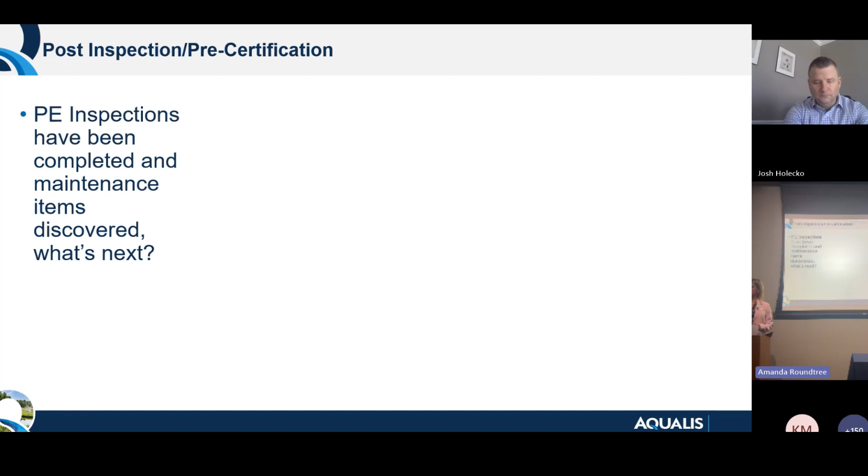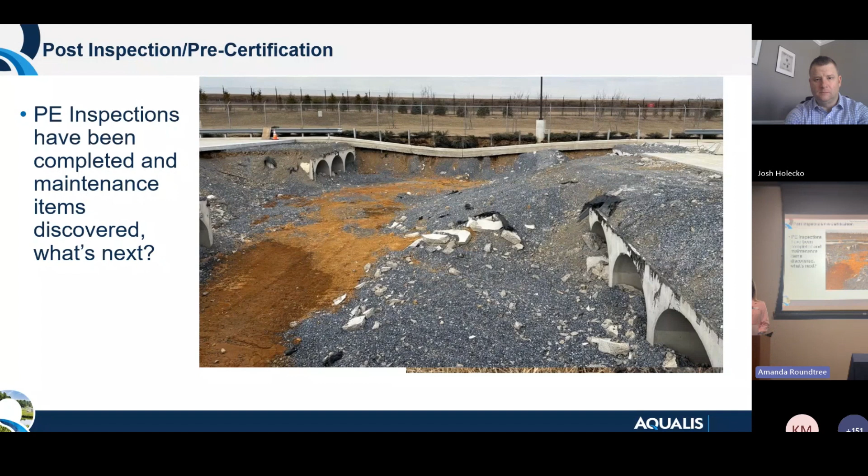We'll see pictures of these basic sinkholes. Sometimes they're minor, but they can become much larger.

At AQUALIS, the field operations use a standard operating procedure so that whatever type of BMP or stormwater control measure you have follows a certain protocol, from inspection to preventive maintenance, and then to repair if needed.

Repair, restoration for a bigger issue, and then full rehabilitation where it's needed. We hope you don't have to go to the full rehabilitation point, but we can help you along the way.

As engineers, we'll see something going wrong and ask why it's going wrong. We should analyze and reinvent or redesign this, because that's kind of the fun part, doing the analysis.

Sometimes we find that the way it was done 20 years ago maybe wasn't the best idea. There might be a pretty easy retrofit we could do to make this much better for the long term, give it a longer life, and make it less difficult to maintain.

So just a couple things on what types of maintenance are expected and routine. Nothing is really rocket science here, but BMPs that are designed with non-natives need attention.

We had a little conversation this morning about non-natives - they need to be mowed like normal turf grass, and unfortunately that means really regularly, maybe once a month. In some climates, maybe more often.

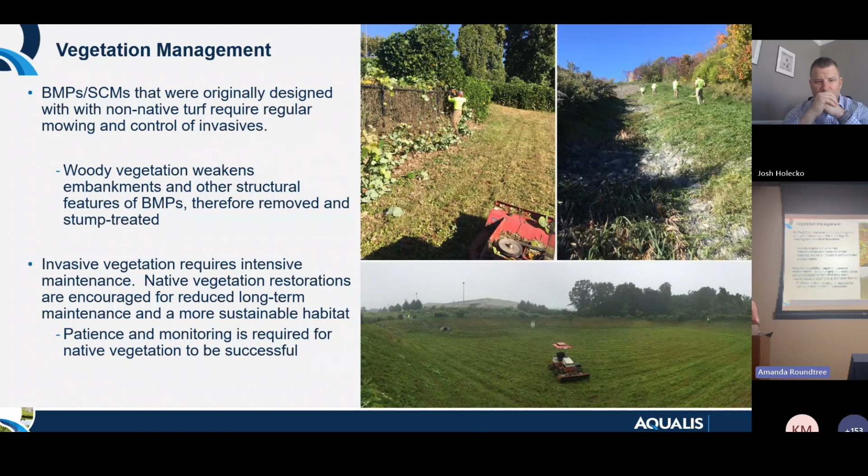So now you're going to have equipment out there all the time mowing lawns. This might look like a landscaper job, but it's a little more than that when dealing with stormwater measures, because what type of equipment is okay to use isn't always the same thing - sometimes we don't want compaction.

Sometimes we don't want a larger piece of equipment running through the bottom of this. Maybe it's just dry detention, but it could be a bioswale, so we don't want a giant tractor out there compacting all the soil. This is the kind of thing our field guys know and understand, and they're able to connect the dots when it comes to what maintenance is the right maintenance.

Woody vegetation, as you've heard about many times, can really weaken embankments. Those things need to be maintained.

Invasive vegetation - if it's non-native and you have invasives, you mow it. If it's natives and you have invasives, there are more processes involved if you really want your natives to take off. It's more selective - maybe only twice a year you deadhead those invasives, do a little spot treating with chemicals. It's a bit more involved.

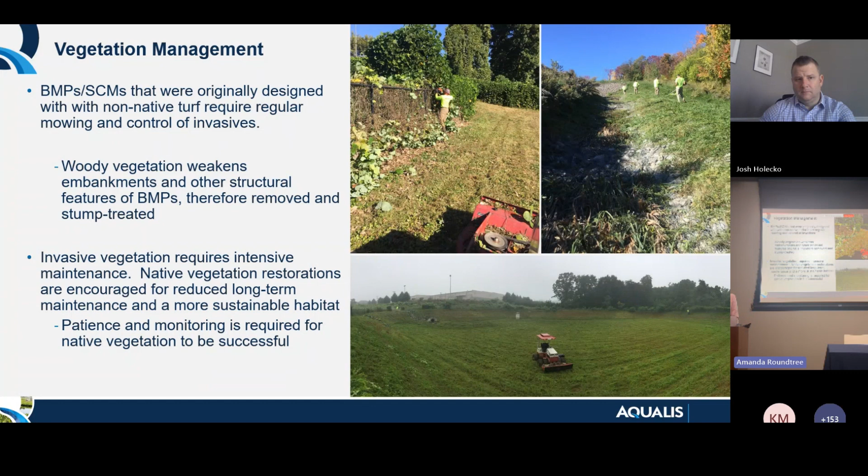Sediment, trash, and debris removal from a lot of the points of entry and discharge - it seems like that's not all that difficult. Well, then get out and do it. It really means get a shovel, clean out those inlets, clean out the outlets. If you don't do that simple thing, you can end up with a plugged system.

Then you overflow and flood somebody, or your embankment for the pond gets wiped out. If it's an outlet structure that's plugged, you could be pulling off the whole end sections of your pipe if that system isn't being maintained. It's just one little thing that starts to unravel, and then you end up with a lot of expensive stuff to deal with.

Josh, jump in anytime you want to add something to this, because I know I can really ramble. You're doing great, I'll keep going.

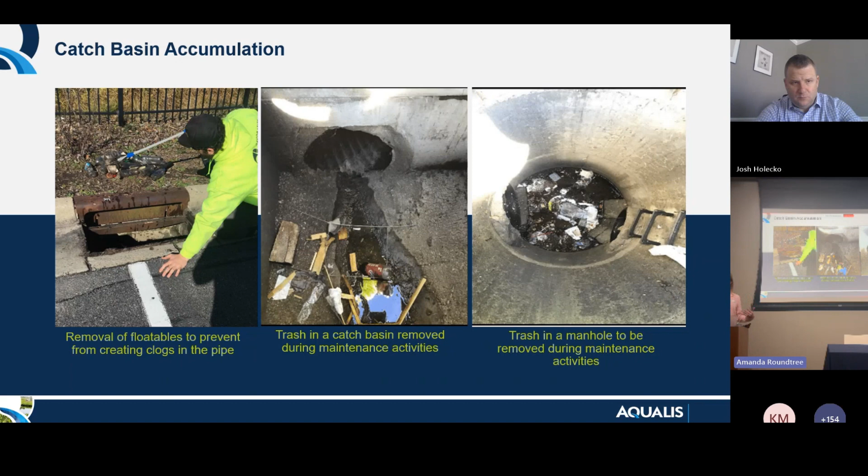Catch basin accumulation, same thing - sometimes it's just clean out your catch basin, but if you don't, it means potentially plugging your system again. You could end up having sinkholes as a result, because the water's going to want to go somewhere, and if it can't go through the pipe, it's going to find a joint, and then the whole system gets to be a mess.

We're going to hear from a couple of the proprietary system people, so I'll save this for them. But some of them do include a valve that needs to be opened and closed every now and then to make sure you could dewater or get things working. Sometimes you want to close a valve to over-detain and create more storage. And if the valves stop working, the system isn't going to work for you.

Amanda, the one thing I'll add is all locations are different and unique, with their own types of assets or proprietary systems on site. So the frequency we're servicing these from a maintenance perspective, and time of year, matters, you want to get to the undergrounds before spring and fall to make sure the water's flowing during rainy season. So frequency will be unique by property and geography. We take that into account as we build maintenance scopes of work to make sure we're visiting these sites at the appropriate time.

Thanks, Josh. I have to hold the computer in a funny way so it's on the microphone, so hopefully it's working.

Pervious, permeable, and grass pavers are their own sort of headache in a different way, and that maintenance will depend largely on what type they are. Manufacturers have certain recommendations for how you should maintain them. Usually you observe first whether you're having issues like clogging, staining, ponding, or settling. Perform some infiltration tests to see what you're actually getting, and if it's not where it should be, that's another indication you need to get out there and do maintenance. Sometimes it's every six months.

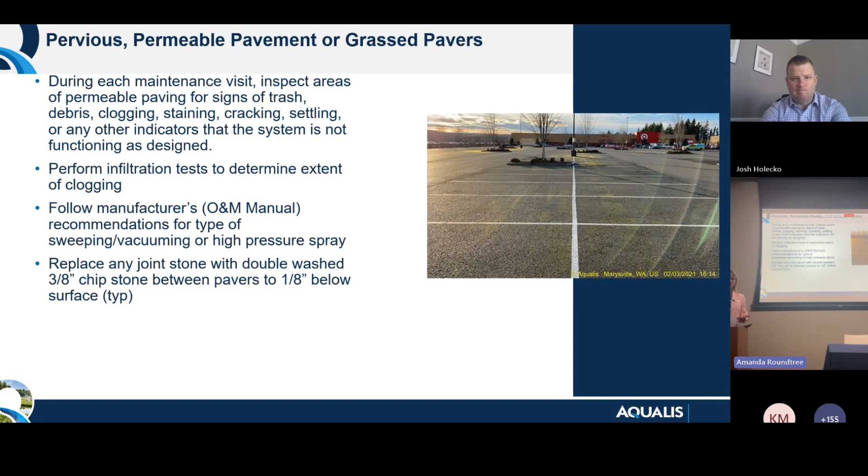And if it's a type that has joint stone, as soon as you clean that, a lot of the joint stone leaves and needs to be replenished, or your pavers will start to move around and not do their job.

Infiltration, biofiltration, rain gardens—anything that's green—similar to some of the stuff you've seen, only we don't just go out and mow, we have to selectively mow, maybe once or twice a year at the right time. Repair erosion areas, replace any dead vegetation with healthy new natives, remove engineered soil and amend it.

If it's starting to clog, you might see ponding, bare areas, or other signs indicating the water has been ponding there a lot. So we need to take that out and replace it with new soil, and look at the embankments and overflow weirs.

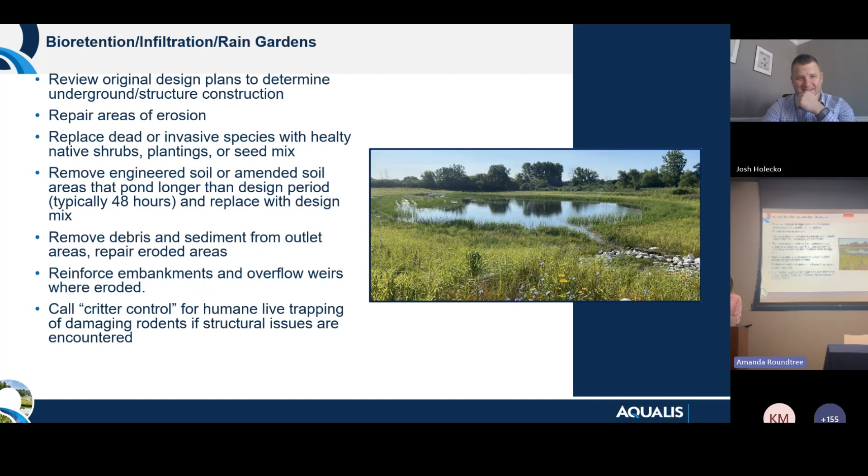We saw some dead critters on the screen this morning. I don't know if Leif is still here. I'd kind of rather try to do live traps and move them off if you can call a service for that. But if you have too many and it's not worth moving the muskrats, and you'd rather have a muskrat fur coat, then that's your choice. I don't know, I'm a hunter, so I'm not totally against it.

Then we have a couple of repairs and case studies, similar to the first slide but not quite as critical or crazy. This is common—you see manholes and inlets with pavement breaking around the edges, and sinkholes in parking lots. That really means water is getting into that structure somewhere else, not going in the right way, not going into the inlet where it's supposed to. It's going down the sides into the structure, or water is leaving through joints in a pipe.

So getting a CCTV inspection out there first to see what's going on is a nice first step. In this case, it's remove the bad pavement, excavate around the manhole, seal the manhole, and then replace it all. Josh, tell me if I missed a step, because I'm not really the person doing it all, I'm just the person saying it.

These are common failure points with aging infrastructure around properties, but also due to freeze-thaw. These are common repairs we do thousands of every year. It's about making sure there's not a safety issue—if it goes unaddressed, it becomes a larger, more catastrophic issue. So make sure you're inspecting those and addressing repairs as needed, so you don't have a larger repair down the road.

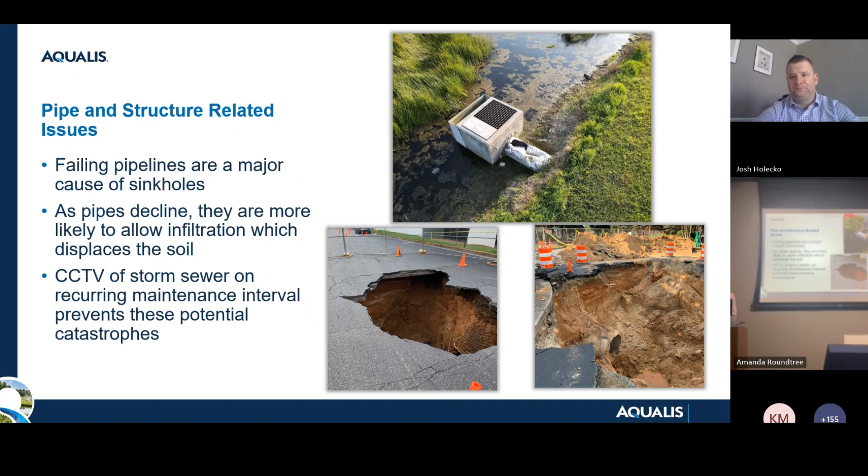Josh, do you know a lot about this site? Because I'll say what I see, but that's about all I know. Yeah, I don't, but this is very self-explanatory as far as this HOA. We work with a lot of different HOAs and different property owners. This one had a neglected area of overgrown vegetation, pipe failure. The outlet was clogged and ultimately it impacted the retaining wall.

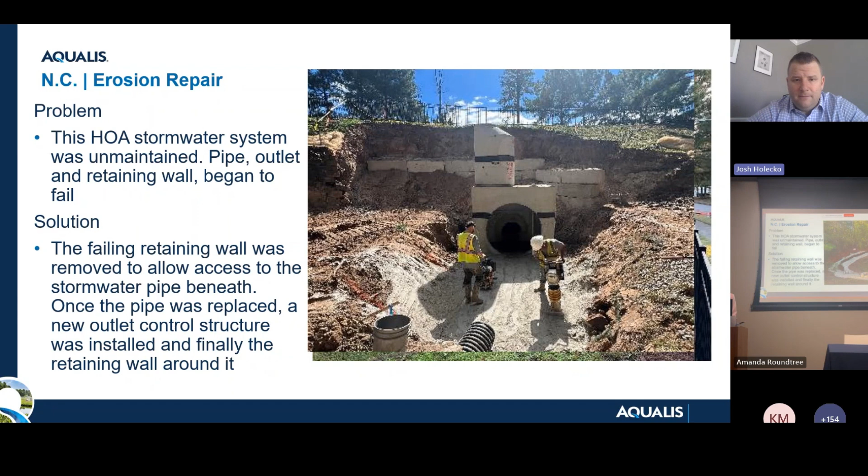So again, something that could have been maintained on an ongoing basis at a very inexpensive frequency becomes a much larger repair, getting engineering involved, structural engineers, to make sure we bring that area back up to design to stabilize the area.

Similar in that it's a pond, but a little different story. This is a pond in Michigan that looks like it hasn't been maintained. A lot of invasive species, a lot of excessive sedimentation, and now the pond's not functioning. I'm sure the outlet's probably plugged, and then they go in and dredge it, and then all the soil is not stabilized. So then that all ends up in the hole, and it just becomes kind of a vicious cycle, especially if the rainfall is not cooperating with you. So making sure that you get the right stabilization when you install is pretty important. Sometimes Mother Nature doesn't play along.

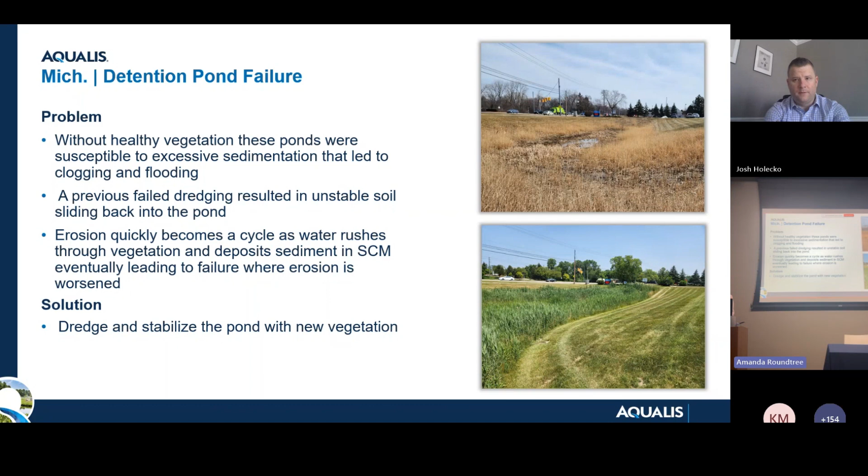Josh, just jump in if you want to talk about this one too, looks pretty obvious. Yeah. Another outlet control structure. Another neglected retention pond, and the OCS is obviously in rough shape. So we ultimately excavated and replaced the pipe and removed the sediment and debris that was in the pond, and then the invasives that we were able to remove. But again, these are very common failure points.

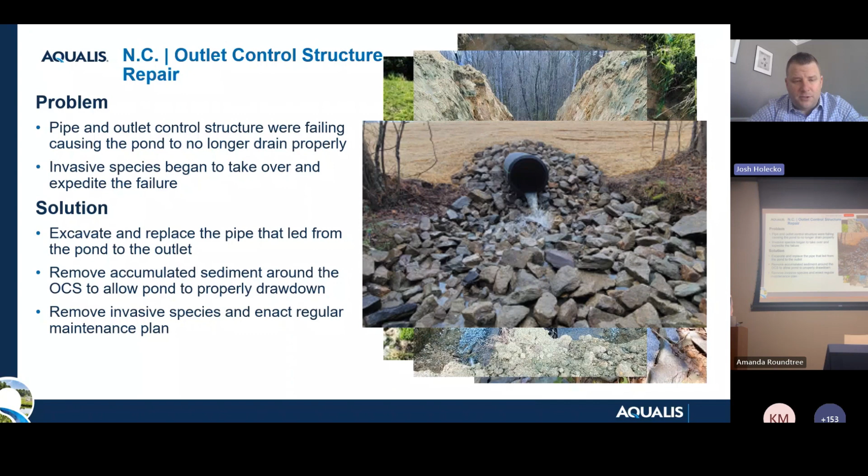Property owners and managers get in the habit of, if it's budget constraints or maybe just not knowing, and over years of neglect that becomes much larger issues. So it's all about taking over that property when it's constructed, or getting it to a maintainable state, and keeping that maintenance up to eliminate some of the larger repairs that you're seeing.

I've just gotten a hand signal from one of our staff, Josh, and I won't say which kind, but it basically was like, you better hustle. Hurry up. We have 2 minutes, so we got to talk fast.

And everybody will get a copy or be able to scan through these screens if you want to pause, take a look. But basically, you're looking at inspection and then vegetation management, structure management, maintenance, and documenting this. The documentation is important because now when you do get a violation or it's time to submit for a recertification on your BMP, you have all this documentation that you can provide to agencies without having to scramble at the last minute.

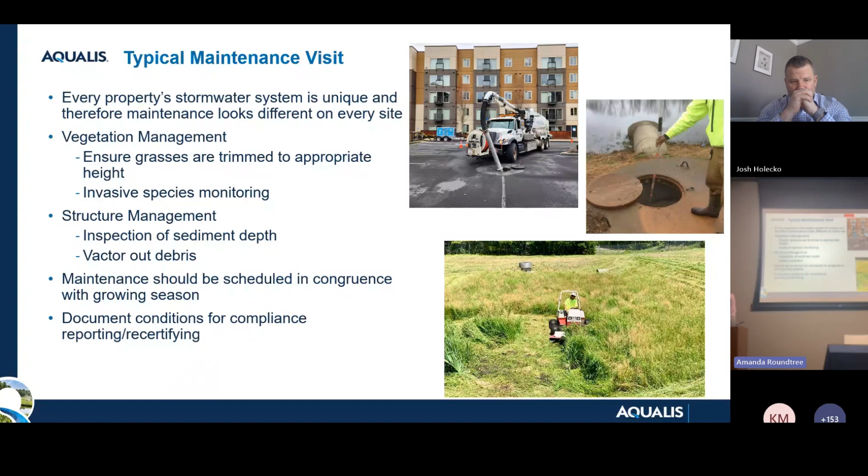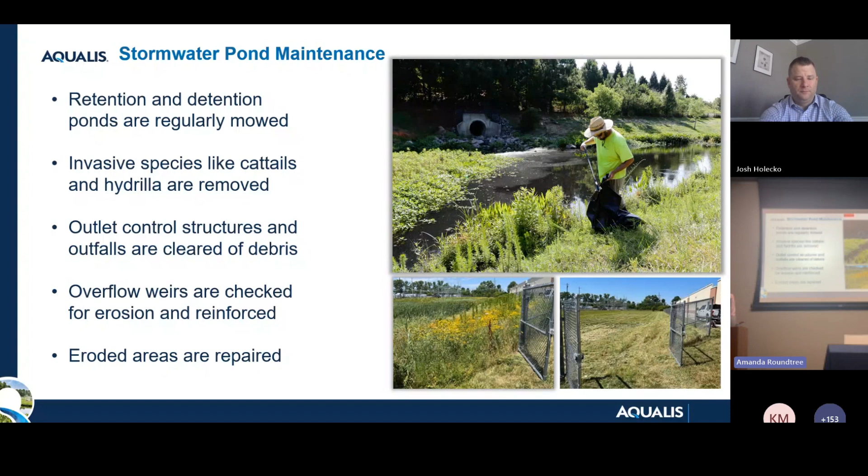Stormwater pond maintenance, again, it doesn't have to be expensive or overly difficult. We're gonna go out there and look at mowing, taking out invasive species, outlet control, looking at the overflows, looking at eroded areas and fixing them. We do a lot with CCTV and jetting and Vactor, so getting in those systems and cleaning them up before they become a problem that is gonna cause you a lot more trouble. Those things that are out of sight can be out of mind and then can be a real headache.

Now, Josh is gonna tell you about one of our clients that we are doing a lot of all of this for, right, Josh? Yeah, so I'll try to run through this quickly, but the main objective, the national multi-site QSR, Chick-fil-A, what they were after is ultimately get a better understanding of what assets they have on their property, what condition are these assets in, and then ultimately making those corrective repairs if any are needed, and then implementing an ongoing maintenance plan.

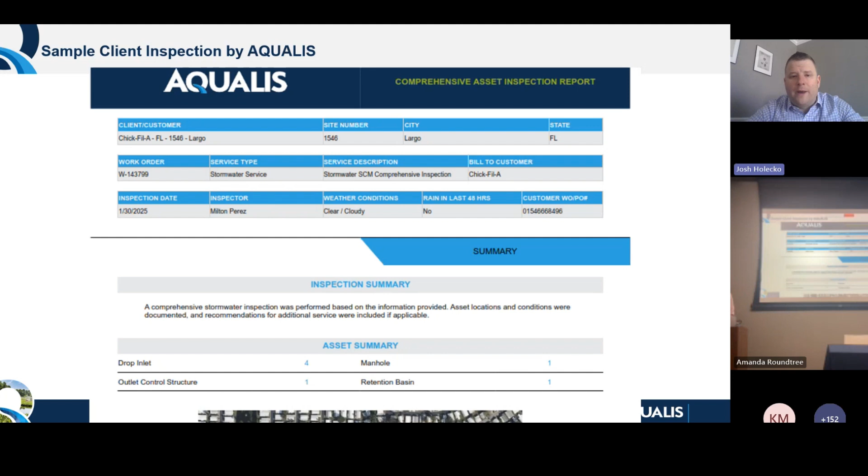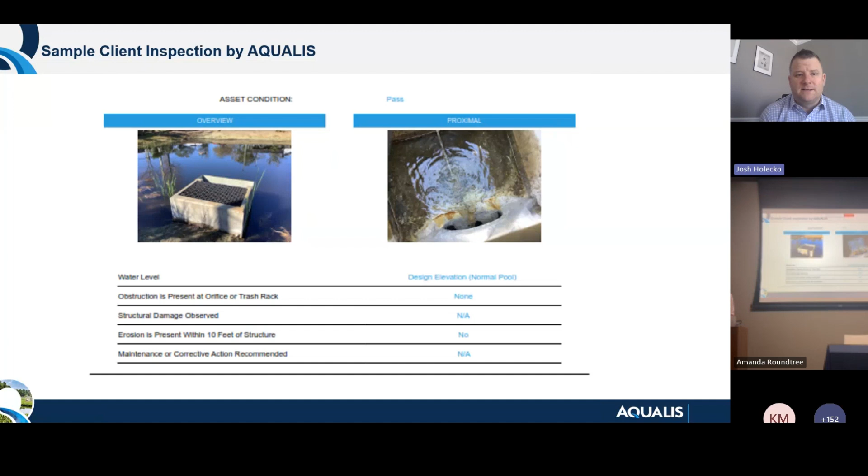So, a couple thousand standalone properties throughout the country. We're going out to collect this asset information. As you can see on this one, you have an aerial of where those assets are. So going through those, taking photos, and then obviously there's some basic questions that we're answering to better understand and ultimately give that back to the team at Chick-fil-A. So, it's a pretty robust inspection, pretty basic information, but it provides a lot of value to not only the customer, but to us as we come up with the plan from capital repairs, ongoing repairs, but also the maintenance that we're talking about today.

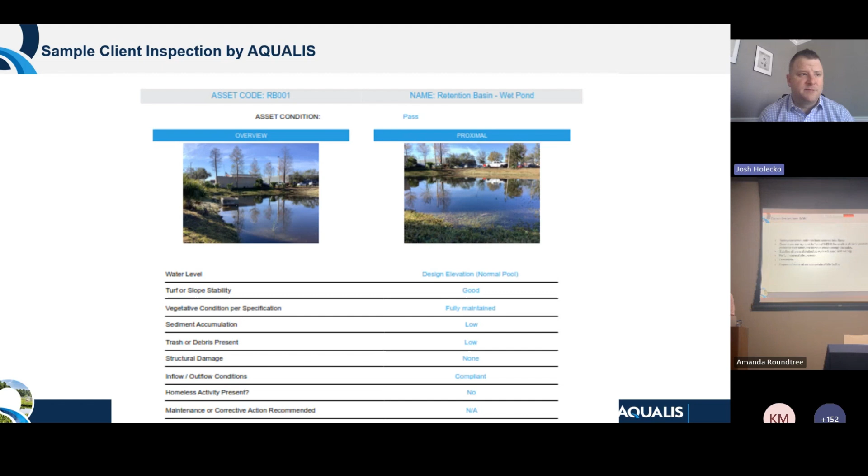So this one is an example. As we went through the inspection, we saw, you go back one. Yeah. So at this particular site, there were a few things that needed addressed. Obviously, we needed to do a pond, a basin dredge, pipe replacement, and some structural clearing and rehab of some overgrown vegetation. So the one thing that we take pride on is we line item and give great detail on what we're actually addressing, because it also allows the customer, the property owner, property manager, to provide this information to the municipality if there's questions on what was completed, when it was completed. So it does give great detail.

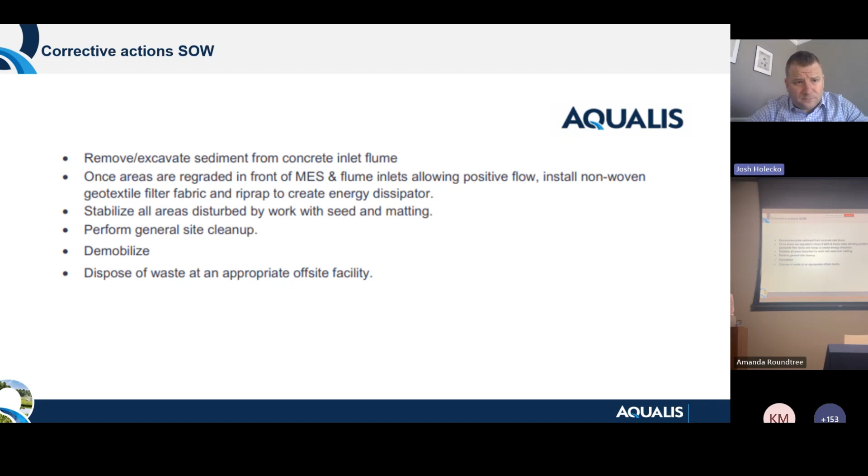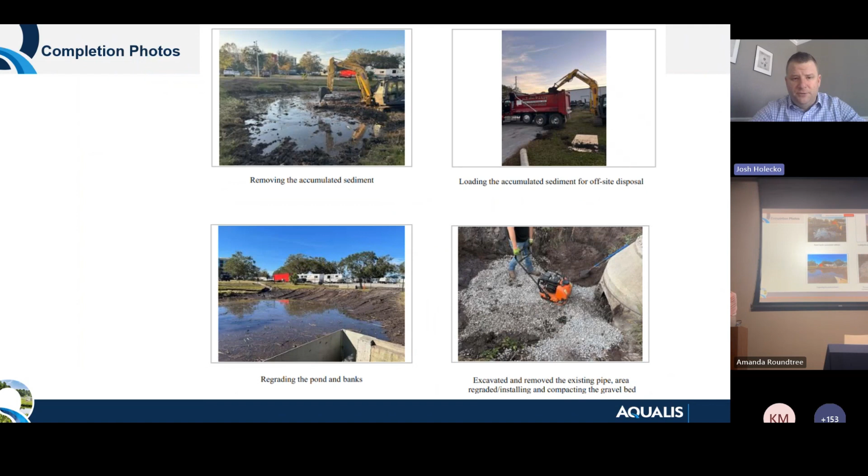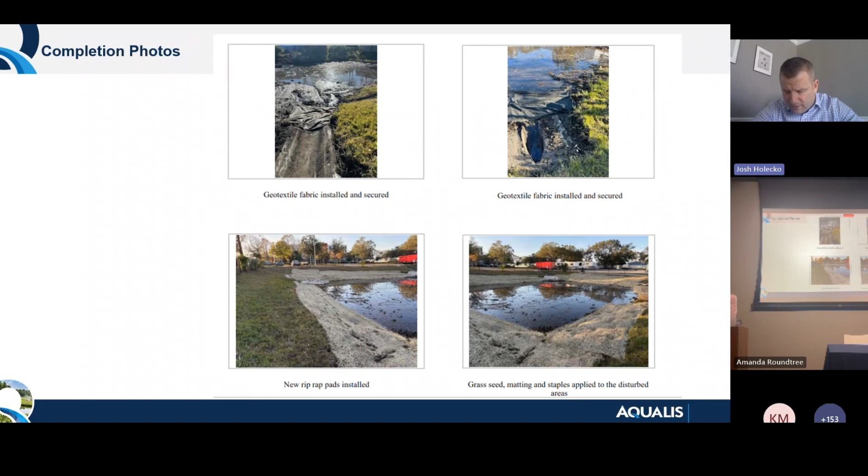And then lastly, we've gone through the scope of work and completed these repairs. We do provide before and after photos of what the site looks like and ultimately what we addressed. And so it gives the full picture from start to finish, to inspect the property, make the necessary repairs, and then implementing the maintenance program for ongoing maintenance at this property to make sure it stays within compliance. And then ultimately functionality is critical to the site as well.

Okay. We really hustled in that last 2 minutes. I would have kept talking, but you told me to hurry up, so that's okay. You did good. That was good. And then you don't have to exhaust yourself. You can save your energy to heal up.

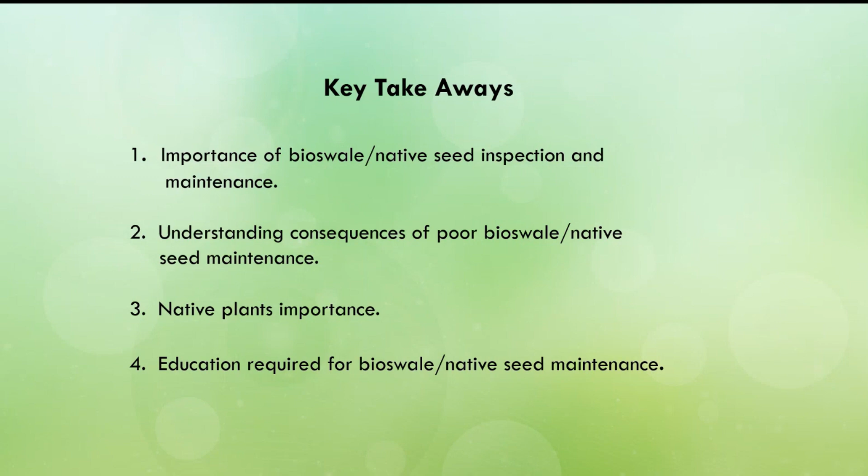So now when we talk about the importance of bioswale maintenance, we also want to mention bioswales, bioretention, and rain gardens. They're functionally similar, with variance in engineering elements. They all manage stormwater runoff and they improve water quality. However, they're different in their design and purpose, but not so much in maintenance.

So poor bioswale maintenance comes with consequences. Neglecting maintenance can actually be expensive, costly, and time consuming. So what happens is when a bioswale is flooded, it may stop filtering the water, causing pollutants to enter the waterway. And also the ponding causes root rot.

And we have also seen overgrown shrubs. They entangle, which inhibits drainage and kills off the other native plants. And the workers complain about rose bushes because they have thorns, and the roots can entangle in the actual drain system. Once they understand the roots or the thorny shrubs are good for trapping trash and leaf debris and thrive in a water environment, they come to appreciate them.

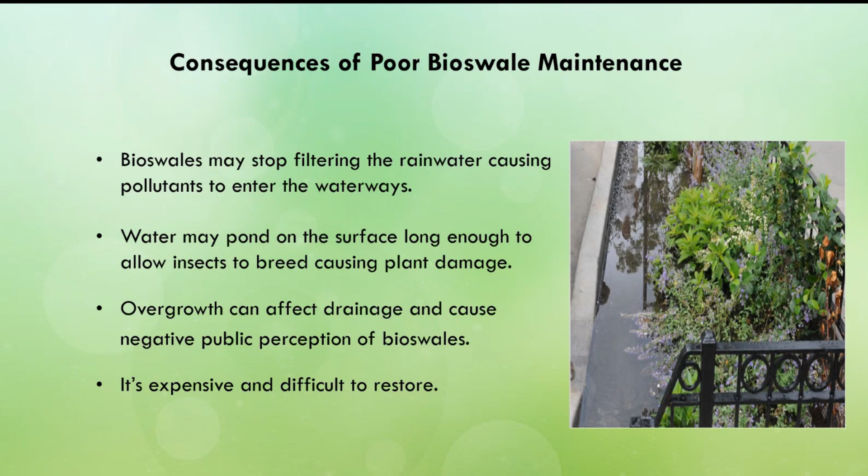There are issues that affect bioswale performance. If the plants are dead or dying, their ability to perform their biological role is diminished. If sediment, leaves, and trash block the inlet, the bioswale will not be able to take in stormwater flowing from the street, which may cause flooding.

If it's left unmaintained too long, fallen leaves tend to form matting, which makes it difficult for water to penetrate past the leaf litter layer into the soil below. This matting can also suffocate the perennial plants in the bioswale. It's okay to leave some leaves for nutrients. They provide habitat for moths and dragonflies. So just a few is okay, in my opinion. So if any of the above occur, bioswales are actually less effective in reducing bacteria levels in the storm runoff.

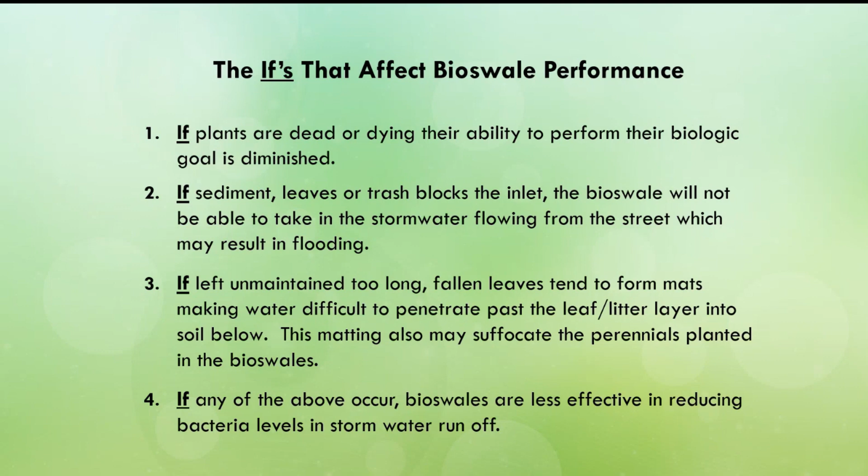Native plants are important; they're very hardy. They can tolerate untoward conditions, they provide habitat and food for wildlife, are essential for human existence, and are healthy for our ecosystem. They also stabilize and provide structure to the bioswale, and filter and reduce pollutants and bacteria. If the area is sparse with no native plants, it can cause erosion pretty badly. So it's important.

When it comes to education, I'm gonna hand over to Karen. Good afternoon. I'm Karen Janicek. I do a lot of the quality oversight of the bioswales, our staff, and our contractors.

And so education is very important. That's one thing we really work on with our employees and our contractors. We don't just assume the contractor knows how to clean a bioswale. So we go out, we work with them, and once we have a comfort level, then they're on their own. And then they send me a list of which ones they did, and I go back out and do a check.

Bioswale construction, we do bioswale construction. It is important, and I know we're talking about maintenance, but when we do bioswale construction, this is a good opportunity for us to educate the public, the people that we work with. And something that you as engineers may want to adopt as a best practice, and this was our discussion, is that when you hire a contractor to develop and build the bioswale, you want to have them scope it at

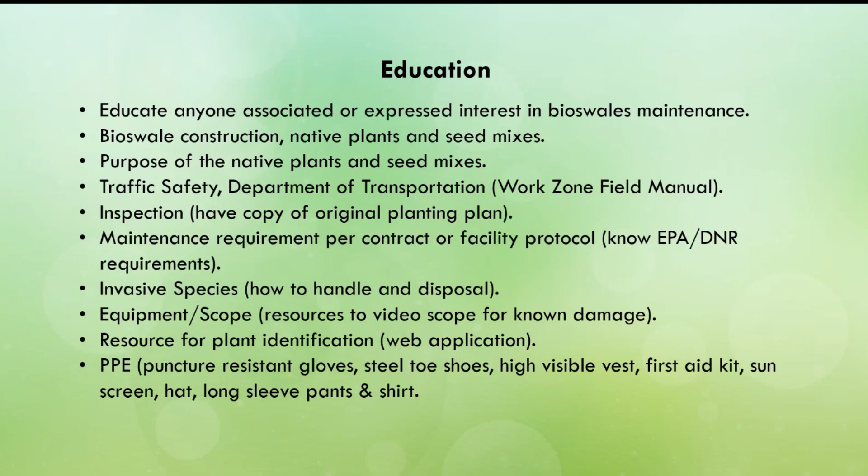Okay, spring cleanup. Spring cleanup to us is one of the most important aspects of bioswale maintenance, because if you do a good job, you are going to have less issues with subsequent visits. And what I mean by that is making sure you clean the debris, weeds and all that, because like Sarah said, a lot of times we go in on spring cleanup and we probably take about 80% of the mulch out. I would say probably 20-30% is already gone from wind and all sorts of things, but we will remove it because nine times out of ten it's decomposed and packed. You can just pick them up in chips. So we like to clean it out and put a nice fresh layer.

That also prevents the weeds from coming up. 2 to 3 inches. I know Sarah likes 4 inches. Prevent the light from coming in and those weeds growing. So even our employees: hurry, we got to get the mulch down, we got to get the mulch down. So they're just as concerned about getting that in.

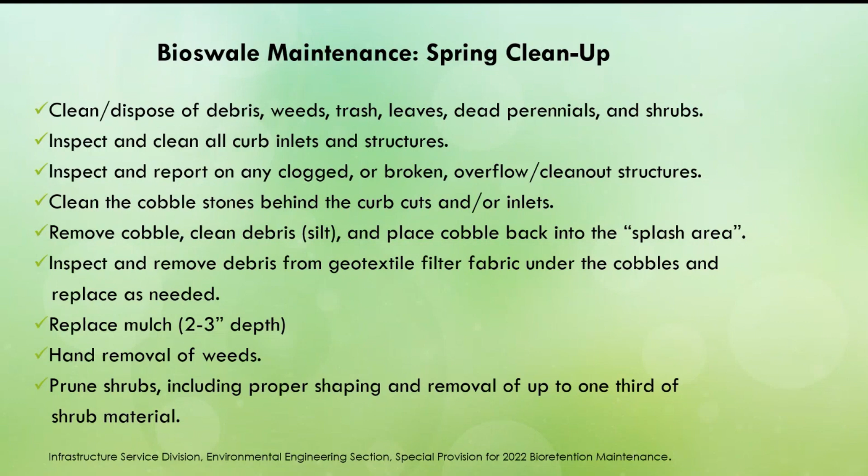Monthly bioswale maintenance should occur every month or more often as needed. A few times we have a couple areas we have to go back because we might have more trash in one area, so we might go back just to do a trash pickup a couple weeks later. But we kind of know our areas, with over 300, we know which ones we have to go back to and check.

Again, if you have channelization, I don't know if anyone talked about that. You'll see a big groove in the soil, the engineered soil. That tells us there's high flow. So a lot of times we'll either say let's get some cobble there, talk to the engineer, or we'll put a different planting there with a greater stable structure and root system. That usually takes care of the channeling. It's just like a little river coming through.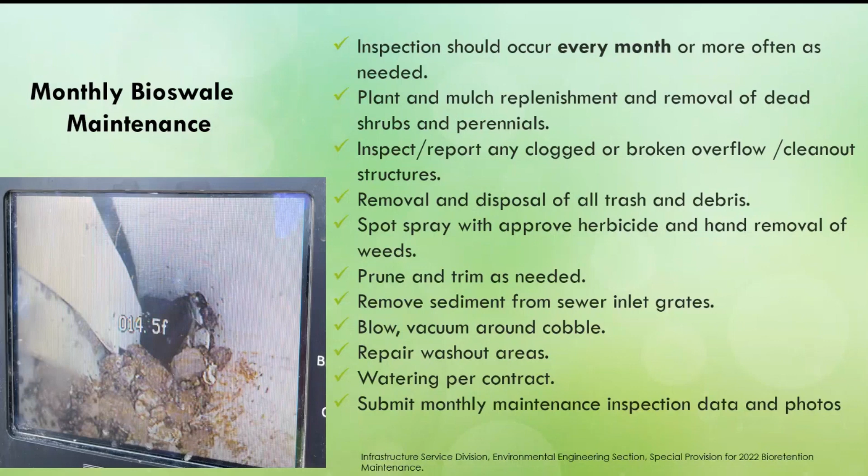So it really behooves us to periodically scope. If you want to incorporate that into a best practice or maintenance plan, it's inexpensive to scope. And if you really wanted to, you could use water, but you have to be careful not to put it at a high PSI because for little clogs we've been able to move them with just a little PSI, but some people want to go in full guns and that could break the PVC piping as well. So keep that in mind.

Fall cleanup—again, spring is our biggest, and then fall is our biggest. There's not much change with what we're doing in fall, except I want to point out: cut down perennials and shrubs, but exclude plants that provide interest. What we mean by that is the evergreen grasses—they stay green all winter long, so let's leave them. They also provide a habitat for dragonflies and other wildlife.

The other thing we will not cut in fall is if it's a newly created bioswale—we will not cut or deadhead anything because we want to make sure it's well rooted first. So we wait till spring and then we'll deadhead and do cutting for a newly constructed bioswale. That's important to share with homeowners or other landscapers, whoever's doing the maintenance.

Native seed, like Sarah talked about earlier, is a supplementary food source. It's pretty diverse—it blooms throughout the season. It's made up of native grasses, sedges, and wildflowers, but we're seeing more and more, especially for vast areas, native seed mix. You can have as little as a 3-combination seed mix up to a 50-combination seed mix.

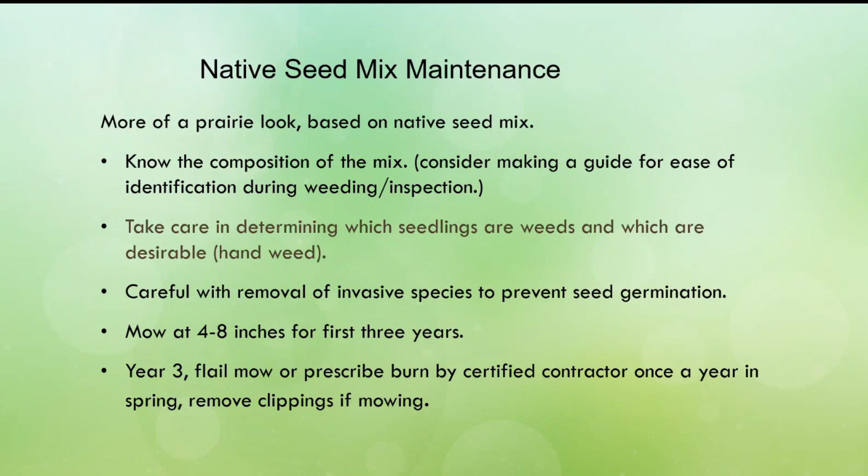And clover maintenance is interesting because who would have ever thought you have to have some maintenance for clovers, because like I said, they're very durable. You mow clover 2 times a year, after it drops its seed and right before the frost.

You want to reseed every few years to maintain the quality and forage. And when we actually seed it, the clover seeds are so small that there's no way you can put that in a spreader. So you've got to hand spread - put some sand in your hand with it, and that'll give you an even distribution when you replace your clover seed.

And weed control - weeds can choke out the clovers initially, but once the clovers take shape, they're pretty good about keeping the weeds out. Early on, they have specific herbicides for clover areas, because it's almost impossible to try and pick the weeds. The thing is, we recommend if you're going to be in an area with a bunch of dog walkers, have clover, because clover does not turn yellow, it stays green, where our grass will turn. So clover's pretty durable, sturdy.

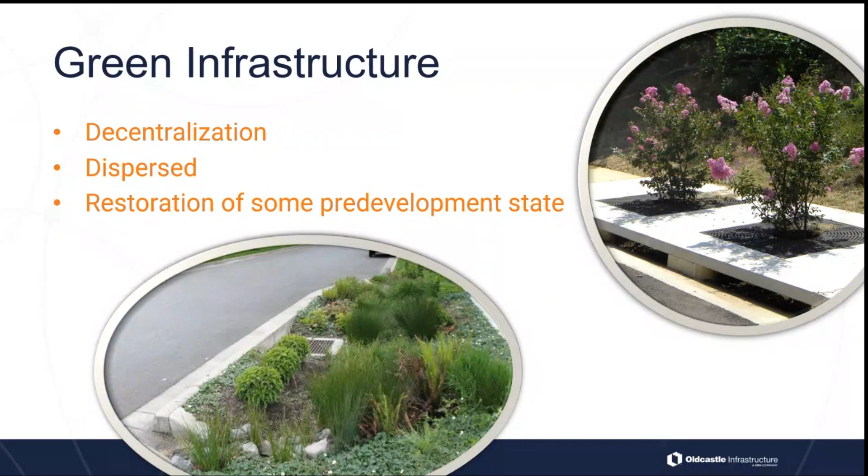So it's dispersed, and it's restoration of pre-development conditions. And the proprietary industry is part of this solution, right? You do a lot of non-proprietary stuff.

The difference is that to be a proprietary system, we go through a tremendous amount of testing. We are tested to the nth degree because no one believes our products work, right? Because we put them in a box and we do magic things with that box and we don't tell people what's in that box.

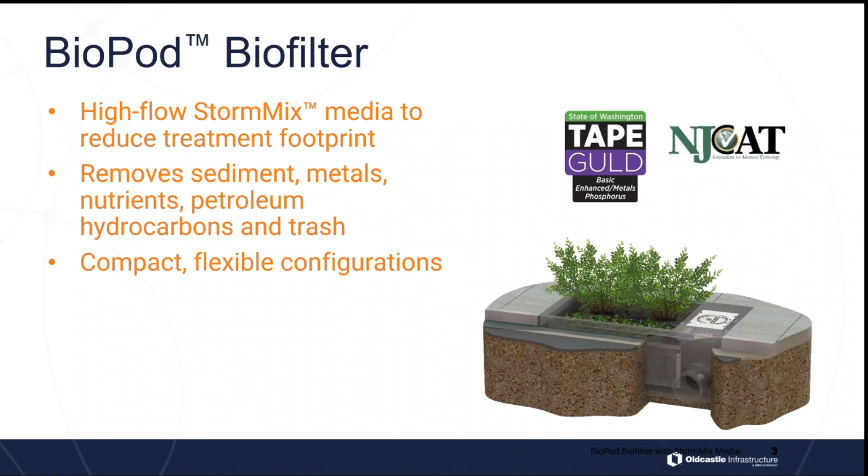But we have a lot of data, a lot of information that we like to share. So the BioPod is, and when we look at non-proprietary and proprietary systems these days, they're all very similar. You have some sort of pre-treatment system.

I'm going to go through and we have, sorry, got out of sequence there. So we have different configurations, versions that have trees, versions that have planting. As it's sort of come up in conversation today, a lot of maintenance people don't like trees and planting because they never wanted to be gardeners. They've got a Vactor truck and a jetter. It's like, what do I do with that and a tree? How do I do this?

So it's a difficult thing. So there is a lot of use. And when you look at retrofitting into highly urbanized environments, it's really difficult to do with non-proprietary systems, and you need to go underground. So this is where the proprietary systems come into play.

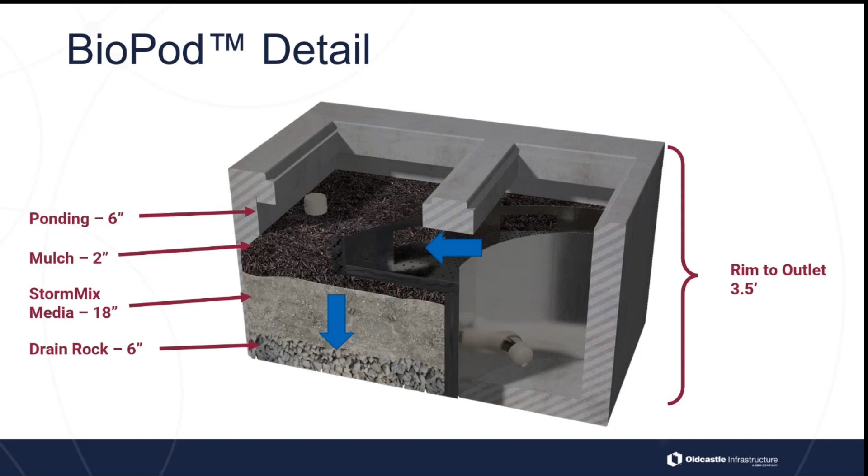And as I was mentioning, they're all very similar. We have a mulch layer, some sort of overdrain that connects to an underdrain. We have a media mix, some sort of engineered mix in there, and a clean gravel base layer going to the underdrain. So here we have basically a mass media filter. It's a big media filter. If there was no underdrain and it was an open bottom going into the ground, it would be a bioinfiltration system. As soon as you put an underdrain under it, it's a filter.

And we make these with all the pieces that you need in a kit set, basically. We have a pre-treatment system, so you have the water coming in through a dispersion channel that allows water to pre-treat. The mulch acts as pre-treatment as well. Then the media is under that, and then an outlet bay. So all that's in there, and there's importantly an irrigation port.

This is something I tell engineers and people that are involved in developing a site: if you're irrigating the lawn, you should be irrigating your bioinfiltration system as well. It's not magically going to produce water and the plants are going to survive. You have to consider it as part of a much larger site management plan. Just because it's in a box and it's kind of proprietary doesn't mean it's magic. We've got to maintain these things and get them established as well.

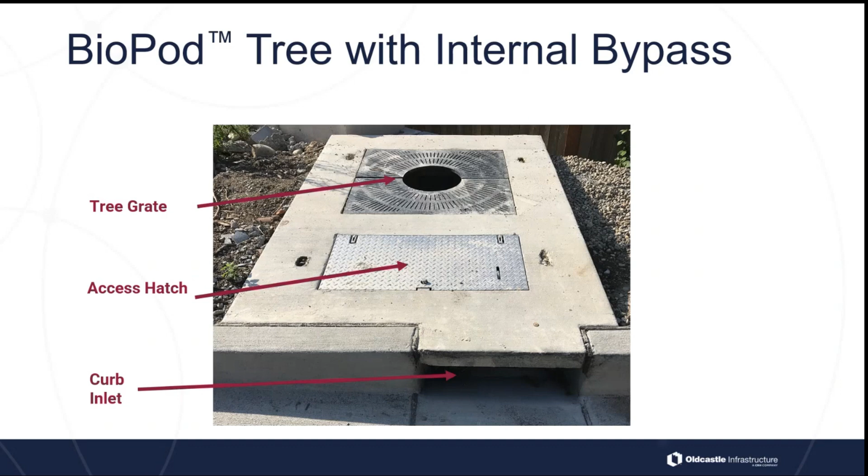We can have different configurations, but on the maintenance side, the death of most of these systems is lack of maintenance and in particular pre-treatment. There's a really good study - if you want to go and look up Ryan Winston, Ohio State University. He went out and studied systems that were less than 10 years old.

And they did hydraulic studies and pollutant dispersion studies through them. His main takeaway from his entire study was pre-treatment, pre-treatment, and more pre-treatment. All the systems that had pre-treatment had 3 times the hydraulic conductivity than those that didn't, because of that mass sediment load. So even basic pre-treatment will extend the life of the system. And this centralizes your maintenance to a point where you can actually get at it with a Vactor truck, and you can do this and you can see it and you can maintain it.

So the pre-treatment is critical, especially in a cold climate. Snow melt - where's a good place to push the snow pile?

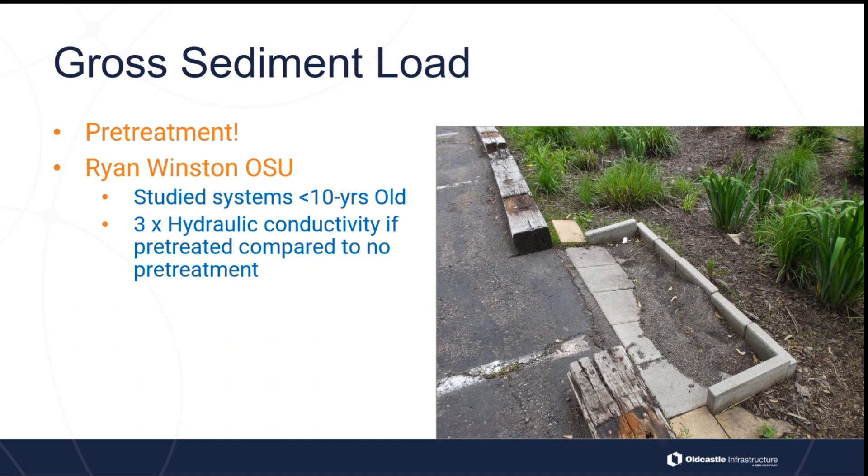And I've done inspections on sites where clearly that's where the snow had been pushed, because all the plants are all leaning the same way away from the parking lot. They had all been crushed by the ploughing. So anyway, Ryan Winston, he's got a really good study that's online. University of Minnesota, St. Anthony Falls Lab. He presented there. It's recorded. It's online and on YouTube.

Okay, so pre-treatment, we include that in our system. We know this because we do a lot of testing and we work out that pre-treatment's a critical part of the long-term performance of these systems. So we have systems with pre-treatment, under drains in the pre-treatment. In some areas, standing water is a problem because of vectors, mosquitoes. So in some parts of the country, mosquitoes are a major pollutant concern because of disease. And so you've got to have systems that don't have any standing water in them.

So there's lots of different, we sit here in the context of a cold climate, but when you're in the context of a warmer climate, it's a different system altogether. You've got different problems and different things, under drains and stuff.

Okay. So maintenance. The mulch layer on top is a critical part of this. This is something we work out because we do a lot of lab testing and we do different configurations. That mulch layer is actually an absolutely critical part of these systems. That 2 inches of hardwood mulch is really important to maintain. You can make these things last a long time by maintaining that first 2 inches. So we have a guidance manual. I'm going to show some pictures here, but when we look at these systems, little visible sediment, we'll go through the picture that explains it better.

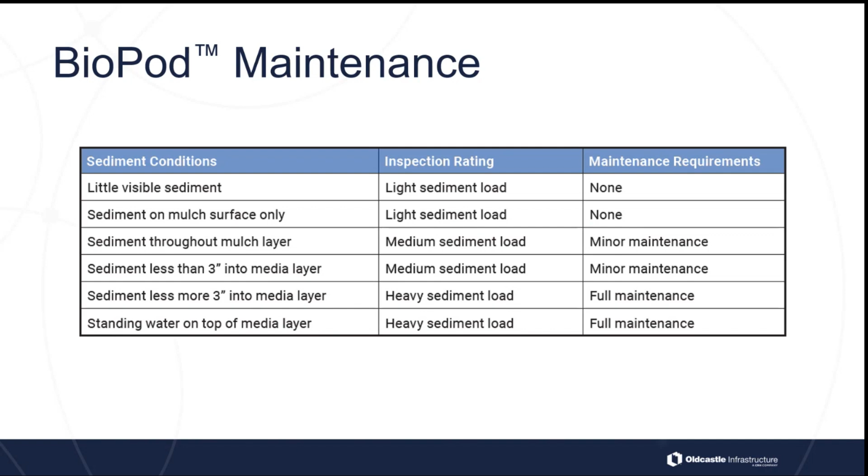Light sediment load. You can still see the mulch. There's a little bit of work going on, but this is the sort of thing where you can probably leave it alone. You might give it a bit of a scrape, a bit of a break up if it's a bit packed down, and say come back in 6 months or the next season. Then you get this medium sediment load. This medium load, you can scrape the surface and you can look at it and go, okay, I can see the hardwood mulch underneath that. It's probably due for maintenance. We should do it soon, but it's probably hydraulically working just fine. You might skip this one.

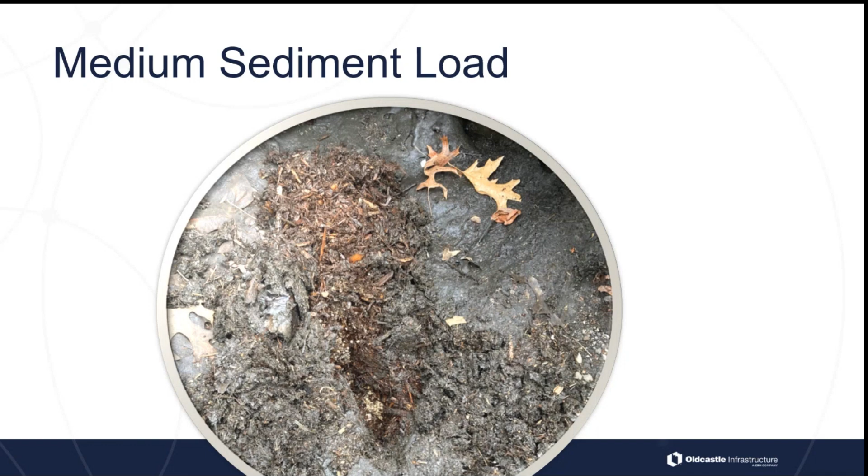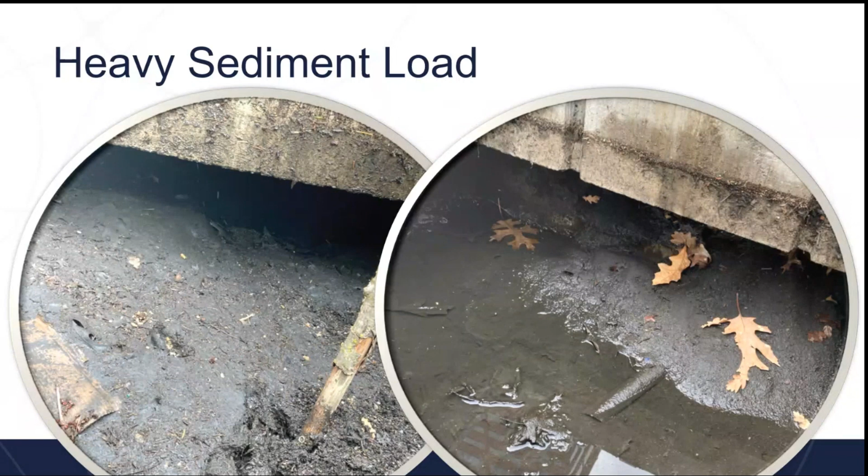And then you get to the really nasty ones, where it is fully loaded. It's not draining. It's time to maintain it. Now, what do you do for the maintenance? Well, you don't need a Vactor truck. Well, we actually say don't use a Vactor truck, because what you don't want to do is start excavating out material that's still good, right? So gloves, rake, standard materials, spade.

And what we want you to do is scrape that material into a bucket or into a bin and vactor out of that bin. So you're not disturbing the media underneath, right? Because you can go to the hardware store and buy a bag of hardwood mulch and replace that for a few dollars. When you get in there with a Vactor truck, you start vactoring out the StormMix media, you come to us and it costs a lot of money, right, to replace that media.

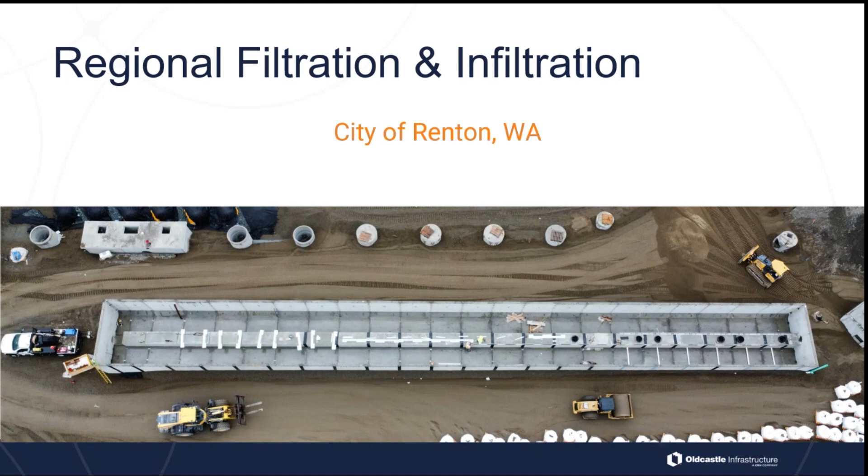And this has a pre-treatment separator at the front. It has upside down box culverts. And what we have here is a pre-treatment system. Water flows in, just over 13 CFS gets diverted to the water quality unit, the BioPod. And then it goes from there into a big infiltration system, an ADS StormTech system. There's no outlet to this. This is all fully infiltrated. So this is effectively a pre-treatment system to another system which infiltrates.

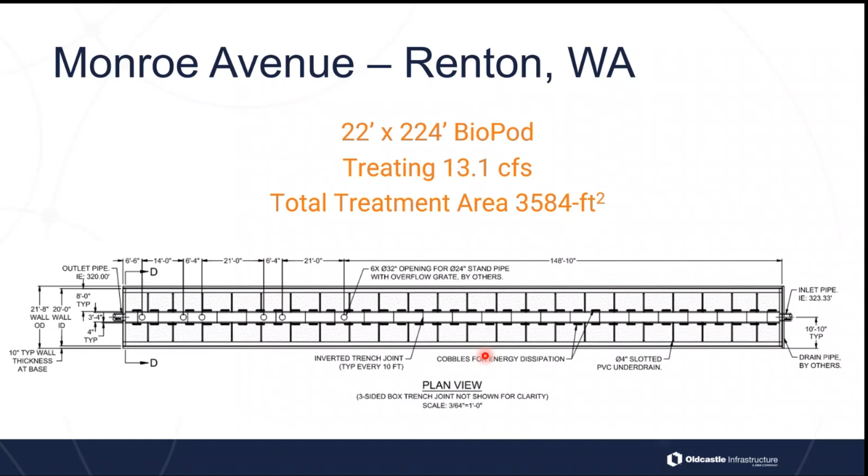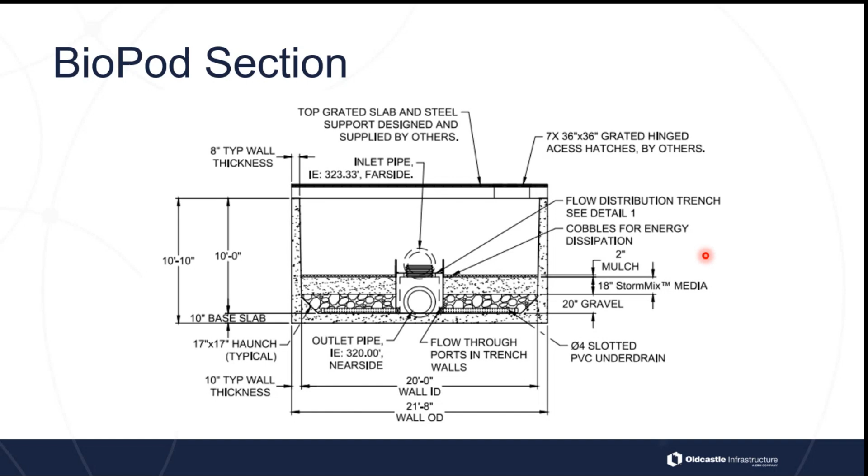So 224 feet long, 22 feet wide, treats 13.1 CFS. Hydraulic considerations: there's 20 inches of gravel under this. Same depth, 18 inches of StormMix, 2 inches of mulch. So very similar. There's nothing really technically different about this. It's just scale, right? And then you appreciate the scale when you start putting people in and realize how big this is. So upside down box culverts, channels cast in there for the inlet and the outlet channels. We'll go through this.

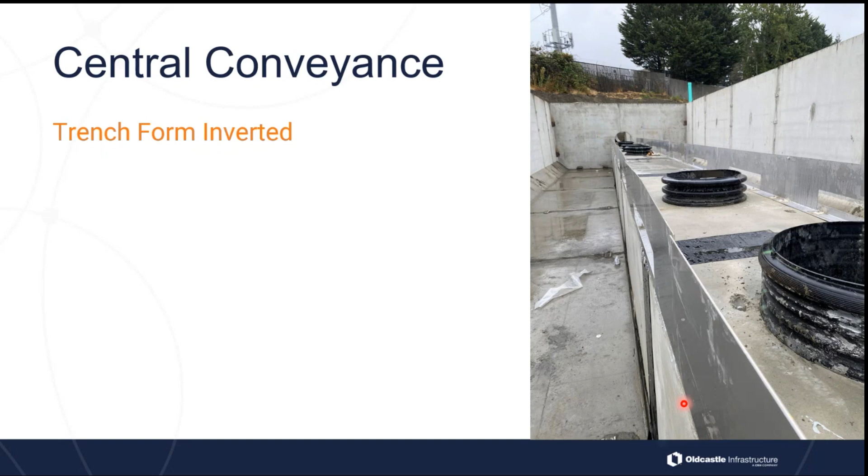So we have an inlet channel, which conveys water down the center of the system and allows it to spill out to the side. And then that inlet channel is actually another box system, and the outlet is underneath. So there are pipes connected underneath. The underdrains go into the same channel and drain out. See, they're not connected here. But one of the things about this is that now we've got to control hydraulics as well, right? Because the water doesn't spread evenly.

So as part of this, these slots can be altered in height. So the City of Renton actually has a whole set of controls that they can go in and swap out over time and control where the water goes, right? So over time, they'll learn how it performs and they will adjust the hydraulics of the inlet channel accordingly. You can see the underdrains there. And that's the outlet channel underneath.

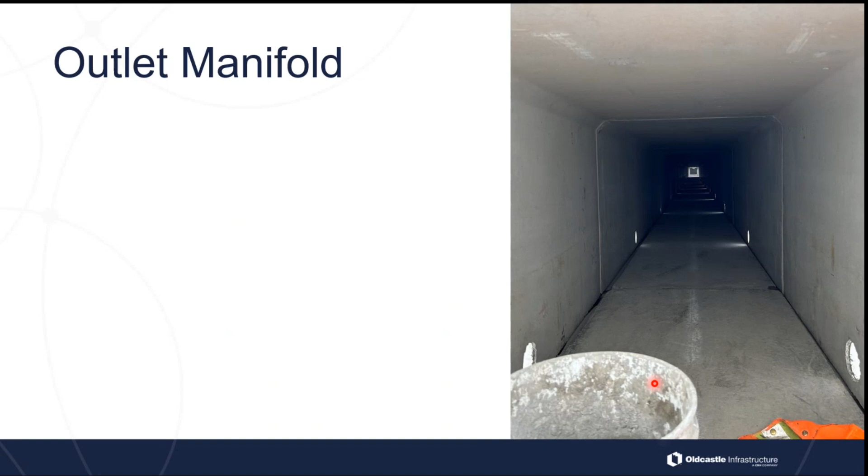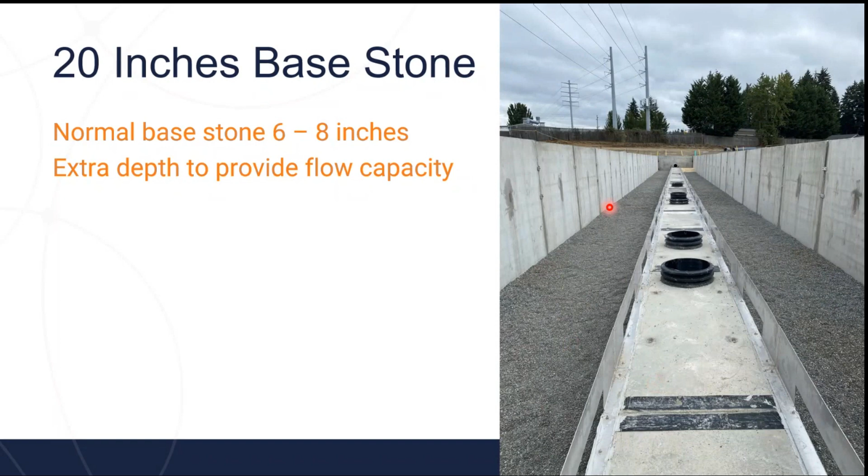This is the gravel bedding, which has got the underdrains in it. And then we have the storm mix media go on top. And you can see the color. This is the color of the storm mix media. And then the mulch layer. So exactly the same, just on a much larger scale. And then the inlet. Now we're working on different systems to eliminate the rock, because no one likes rock. It's really hard to clean rock. In this case, it's just acting as an erosion control for each of those inlet slots in the manifold.

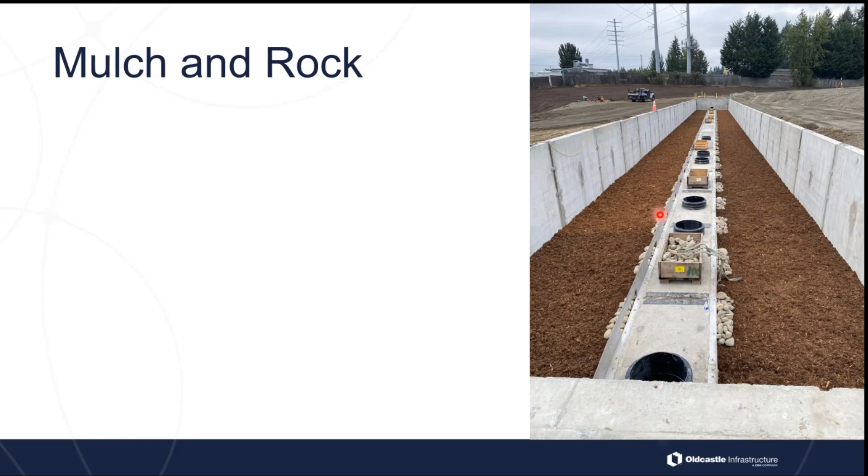But again, the same thing. Your inspection looks at that mulch. They can replace the mulch. And for safety and for maintenance access, large lightweight covers, so they can lift everything off and effectively make it non-confined space entry, more or less, because they have full aeration through the whole system as well. So designed with maintenance in mind. And then planting each side to hide it, so that from the parking lot, you look out, you don't see it, you just see plants.

So a lot of stuff goes into a system of this size. You can see here the entrance to the manifold system for the infiltration area, which is off to the right. Each one of these is a different system. So yeah, you can do green infrastructure on a large scale and make it really easy to maintain, because now you have a single point of maintenance for a whole 160 acre or more, 200 acre development.

Now perhaps it's a little easier to do this on the West Coast. This is in Washington, because the rainfall pattern is a more dispersed rainfall pattern. If this was Florida, this would be harder, because the rain comes in very compressed, short bursts.

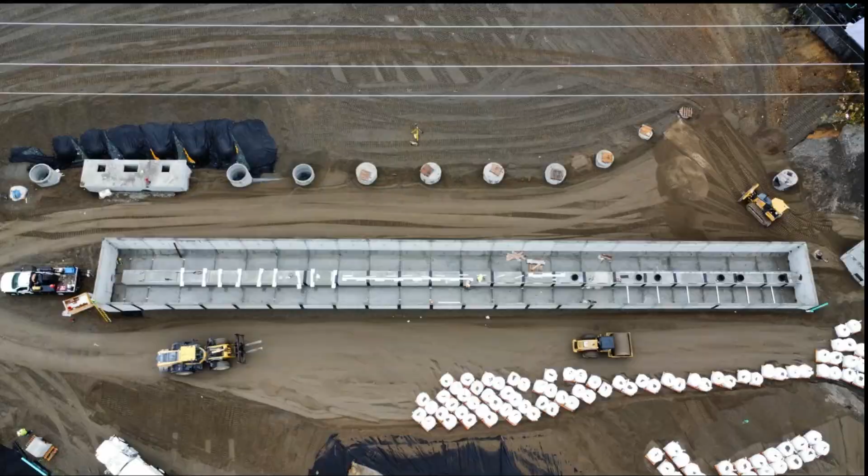My name is Cassie. I work with Ferguson. I actually used to work with Stormwater Solutions Engineering, so probably you guys know me from that, for 6 years, and then the last half year as AQUALIS. So I now work with Ferguson Waterworks Group, the Geo Stormwater team, and I support civil engineers, landscape architects, developers, municipalities, contractors, et cetera, to provide a suite of solutions addressing challenges associated with geo and stormwater design.

So today, based on it being a maintenance seminar, which was a brainchild of Carrie's mind a few years ago, I thought I'd present on some pre-treatment devices that can really help. When I went from engineering to the Ferguson side, I was like, wow, it would have been really nice to know about these things that could have helped in my design back in the day. So I thought that'd be something good to show today. I'm going to go over a quick background of Ferguson, then the triple bottom line co-benefits of GI, then get into pre-treatment and specific devices.

So I wanted to start with this slide because after being a consultant for a long time, when I talked to our director, Rob, and he was like, do you want to work with Ferguson? I was like, what? I don't want to sell pipe. That's weird. I was very confused. He has actually been working over the past 3 years on developing the stormwater and urban runoff team. So normally you'd think you get your underdrain, your Nyloplast grates, whatnot from Ferguson, but we have this really cool subset group that I'm a part of.

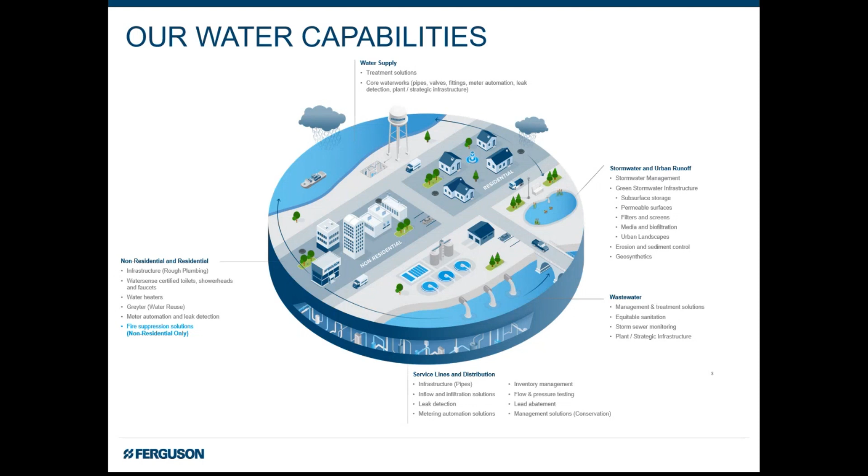And it's pretty much in the space where it's followed what green infrastructure plans are doing in the cities and what we were trying to offer, whether it's ourselves or our vendor partners, as solutions. So we came up with these categories of space efficient storage, filters and screens, media biofiltration, alternative surfaces, and urban landscapes. Today I'm going to be getting into mainly the filters and screens side, because that's where the pre-treatment devices are.

So getting into gray infrastructure, I feel like everybody knows it, but that switch from your gray to including the focus on green infrastructure has been proven to be a better and dynamic approach to both water quantity and quality, right? It's helping our downstream effects. And it brings municipalities or anybody who has MS4 compliance up to that regulation.

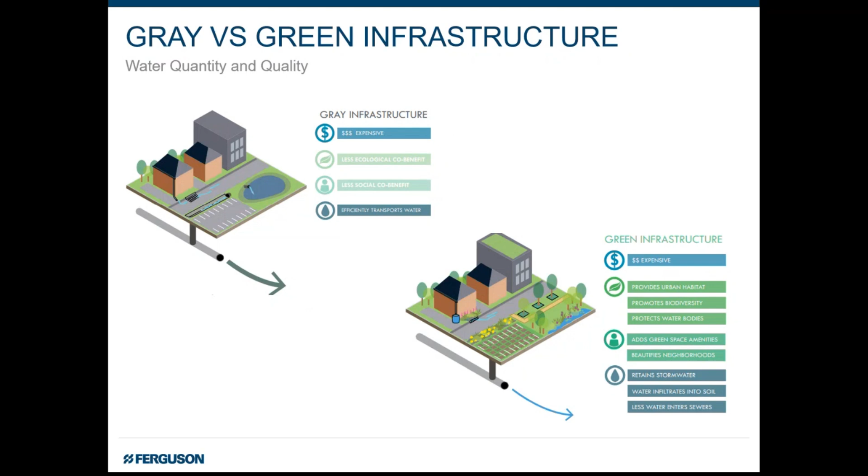Okay, so thinking about the amazing benefits of implementing green infrastructure, there's a lot, right? So you have your triple bottom line co-benefits, and that's your environmental side, so thinking about water pollution, reducing the urban heat island effect; your social, so thinking of the aesthetics of your community, and public acceptance of any kind of green infrastructure. That's the biggest thing. I know Sarah hit on it: what is this? Why does it look like that? As we all know, it's about education and making sure that people understand why we're doing this.

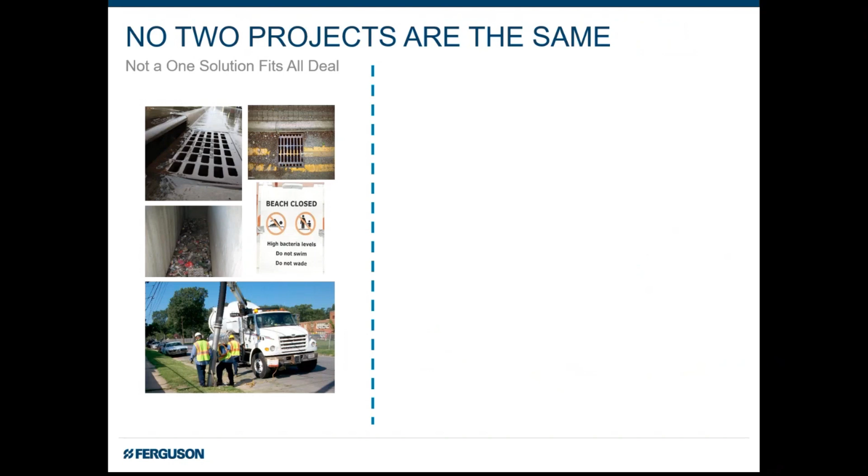And then also that economic side, so reducing the costs of things. We're really thinking about what the full benefits are. But as we grow awareness around green infrastructure, we have to remember that to reach those benefits, a lot has to go through it. No project is the same. Really looking at design variables: what space is available, what's the goal, right? Is it for water quality, for quantity?

Things like your soil conditions, steep slopes, looking at your site, what's going to be the optimal place to put something in comparison to just what you're thinking where it could go. I think the biggest thing that I definitely learned was you have to go out on site, you have to be looking at it, eyes on the grounds, inspecting it, really seeing what's out there before you're putting something in. Pictures can go maybe 75% of the way, but 100% is for sure being out there in the field, understanding where you can put things based on what's happening on site. It's really beneficial.

So other less definable variables. So the opinions, past experiences, thinking always about the budget in mind, winter consideration, that's something of ours up here. And the biggest thing, collaboration is key, right? No matter what, it's just like Sarah's saying too, making sure that you're going to be continually having those conversations with everybody that's on site, your engineer, getting them to understand why something may have to change because of constructability. Public retrofits especially have a lot of their own unique challenges, as there are utilities buried that we don't know about, things that are just uncertainties.

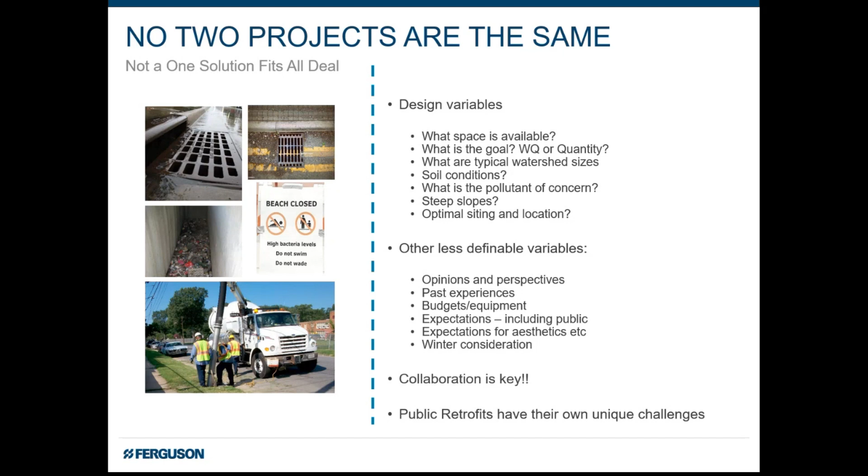So when looking at these projects and taking a survey from 150 engineers, kind of like fun, this was a Family Feud thing that my director put together, but I'm going to cut to the chase. The main challenges we're seeing is cost and maintenance. And it's over years, right? So continually saying over multiple years, what's going to be the biggest thing? It's maintenance and cost. So that's kind of been the story since the beginning of time, right? That's always what it is. Do you have enough personnel? Do you have enough budget to do this?

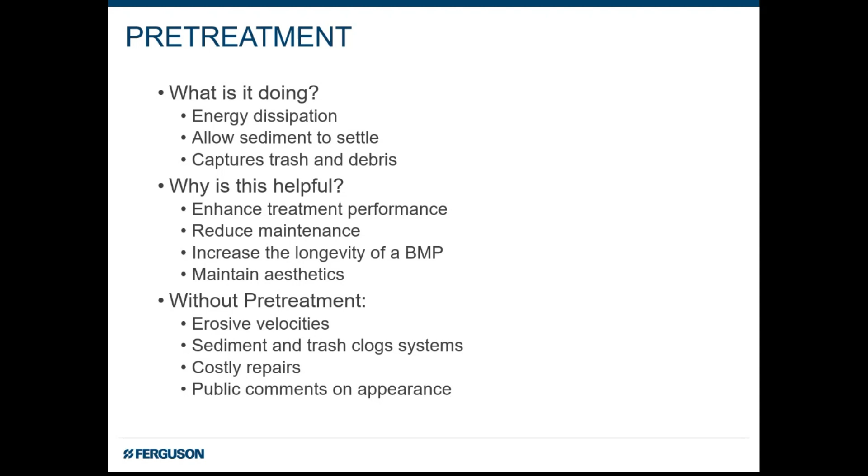So what we can really do to think about protecting those BMPs throughout the years of its lifespan, knowing that the budget just is not what it could be, and we don't have time to really fix it, is really thinking about pretreatment. So enter pretreatment. What is it going to do? It's going to be helping with your energy dissipation, allow sediment to settle, giving somewhere for that trash and debris to be captured. I know Phil kind of just hit on some of this stuff too, with the pretreatment of seeing all that sediment going into that little nook area before your bioswale on the sides. Really thinking about why is it going to be helpful. So you are thinking about that maintenance and the longevity of it.

If there is going to be the hydraulic conductivity that's still there, and you're able to not have just a ponding bioswale where you're not going to have any type of infiltration, which is the whole point of it. And just think about, if it wasn't there, what really will happen on site? Will you have erosion that will happen within a year, 2 years, 3 years? Are you going to have a buildup of sediment, trash? Are you going to have costly repairs? Carrie hit on that, thinking about when you're going to be doing something maybe every year, every 2 years, as compared to every 5 or 10 years. What's going to really help in the longevity of it?

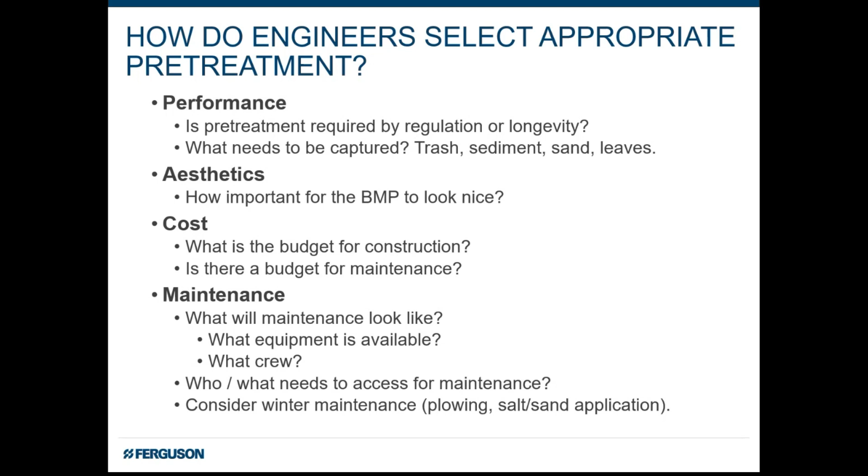So that's kind of just the amp up of why pretreatment is needed and everything. So I'm just going to go over a few different pretreatment devices for surface BMPs, and then I'll go over some for underground storage units. I just put a few in here. We have a lot of really cool vendor partners, but I just wanted to do a few that I know have been really awesome lately.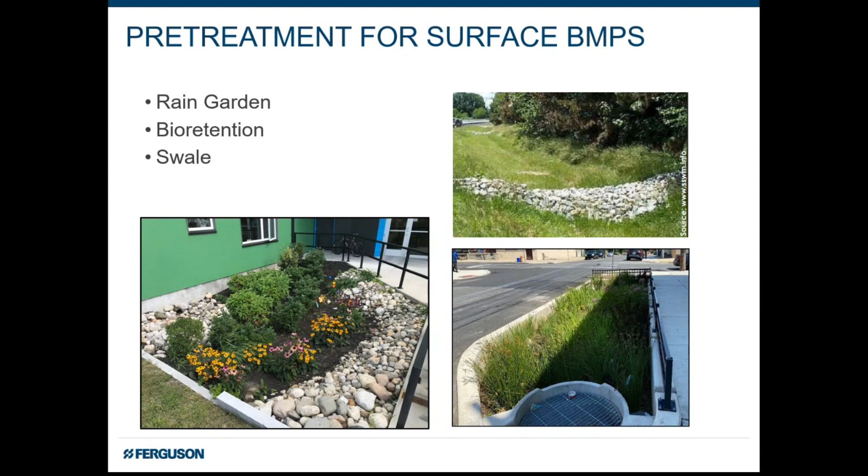So pretreatment for rain gardens, bioretention, bioswales, grass swales, any type of vegetative facility. That's what we're going to look at first here. I'm going to start with the Rain Guardians. So these were actually developed by the Anoka Conservation District in Minnesota. And I think that just speaks for itself.

This was made by a group that was continually getting public outrage of why is my median bioswale in my city looking like this? How can this be dealt with better? There's not a person to really go there every week to pick up the trash, the amount of stuff that would be thrown out of somebody's car window and put into a bioswale. And they really wanted to think about what they can do to help collect that stuff and also collect the solids and sediments that are going to be weighing on your biofilter for a long time.

So they came up with 4 different designs, and I'll go through them each. There's concrete, and there's also a plastic structure that removes some of your TSS, trash, and debris. They are decentralized devices. They're super simple. They can be a retrofit; it doesn't have to be at the beginning of the design. If you have any type of curb cut area, that's what you're really thinking of it going into.

These ones are for your smaller areas, but this is the Turret. It's a really cute little circular device. Your curb cut comes in, you can see solids and everything building up, going into the filter area. Actually, the picture before, this is what it is. So there's your top grate, water comes to the back, and then you have your overflow on the side where you have your exit. There's also a filter down here, so that's going to be blocking sediment, debris, etc., from going within.

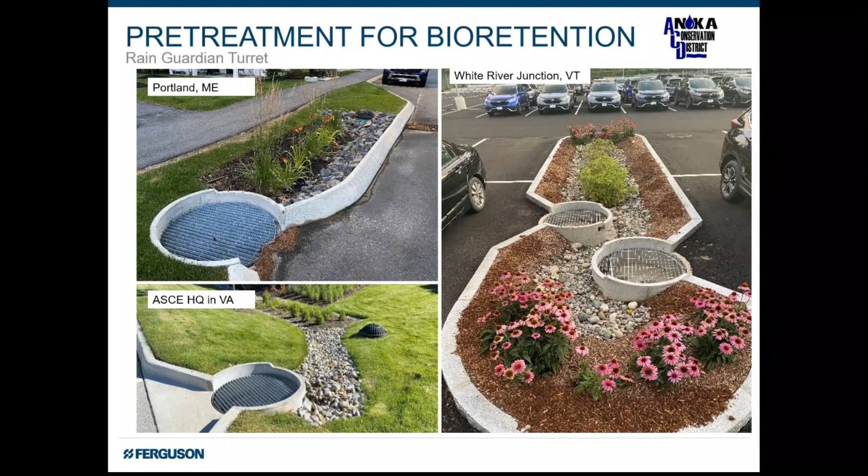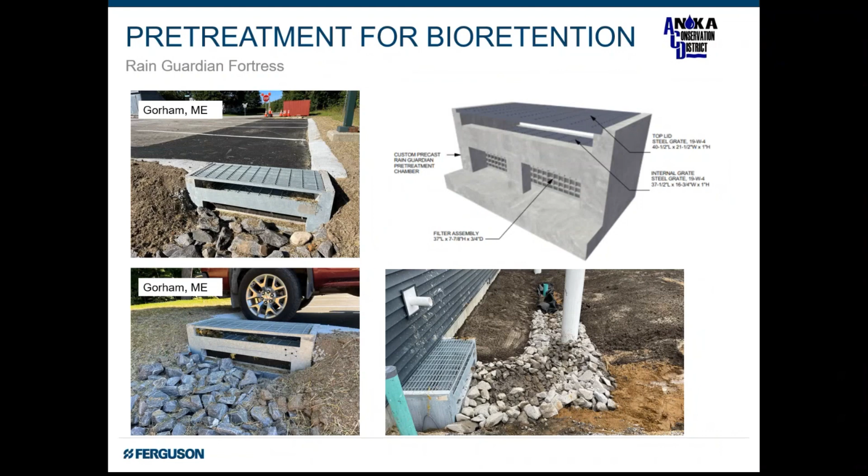This next one is the Fortress. So like the Turret, it's a precast concrete structure. The top and the internal steel grate will collect your large trash debris. Then the internal removable filter helps keep the collected solids from entering your BMP. And then there's also a high overflow as well. You can see with all these pictures, they're used in different applications, if you're still going to have a riprap area, if it's going to be straight up a grass bioswale, or anything else.

And then this last one from the Rain Guardians is the Foxhole. This one is used for applications where you're conveying water from maybe your parking lot area, your alley, your street, across the sidewalk into your BMP.

So thinking about it, you can still have your bike or pedestrian passageway go over it, but your water can be transported to the other side. Again, just different filters in there to hold back all that trash, debris, and sediment.

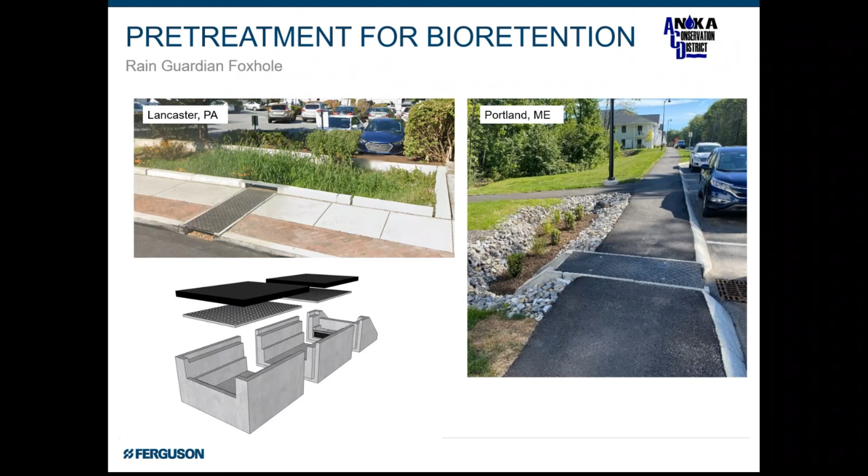You can also see this one has the top grates, which are lightweight and pretty easy to take off. For all of these, it's really easy to just take up your screen. You can use a shovel, a shop vac, a pressure washer, or a full-on vac truck. It really depends on what you want to do, but it doesn't require a vac truck—that's the biggest thing. So if you don't have a lot of that in your budget, you can just have a person go out there and maintain these easily by hosing off screens. It's pretty simple stuff.

And then for those larger areas, where you're having a large acre-plus going to it, we have a pretreatment device. This one is more similar to what your inlet structure will look like, with a baffle and weir. It's concrete, collects all of that stuff, and again, it's another decentralized device.

This is just what it looks like in person. So the water can come back—you can see on both of them. Water can either come in through a similar curb cut area or through your top grate. Then it goes through your baffle and weir, where your sediments, solids, and trash settle at the bottom. Eventually it will go out through a final filter either to your BMP, or, as you can see in the top one, you have a higher stone area where you have infiltration right away instead of just going above surface into it.

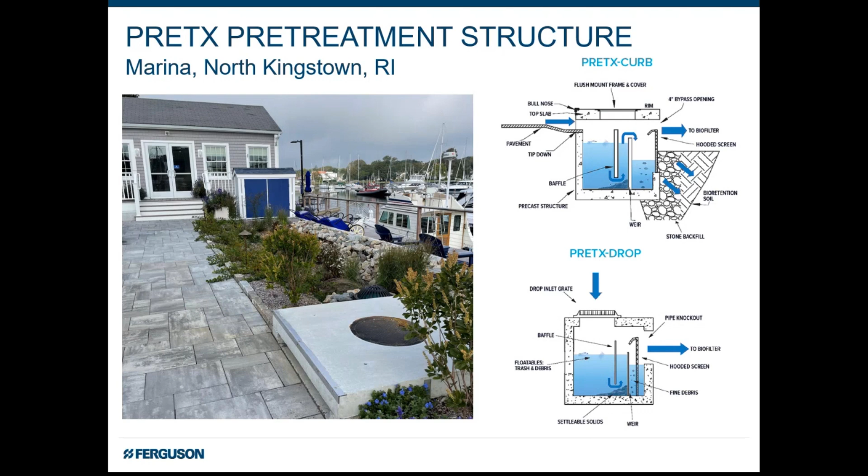Again, just something where you can back jet it out, but you can also use small, simple things like shovels and shop vacs. Hopping into pretreatment for subsurface.

I know I'm probably five minutes in, not even. There's a lot of different storage options out there. Philip mentioned ADS StormTech—you have circular pipes, you have maybe your storm capture big concrete systems, or a modular system. For some of those, there are treatment rows and isolator rows within there, which is a really great thing to think about. It's not required here.

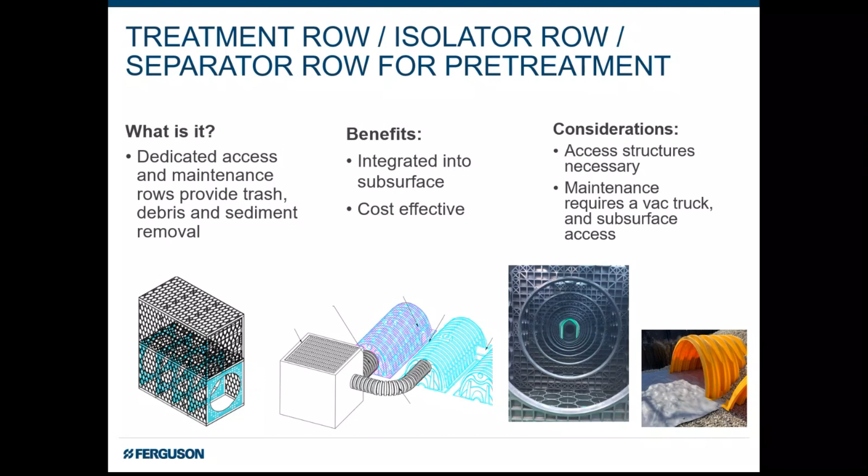And then when you're looking more at what could be done before your underground systems, your centralized pretreatment is a really big thing. I think these are things we've all seen, heard, and know about—probably the most boring part of thinking about underground storage stuff. But what it's really doing is getting your sediments, your trash, your debris, your solids out. Most of them are NJCAT, NJDEP, Washington TAPE-approved, so when you need to hit that for your regulatory requirements, those certifications are really nice to have. This just lists some of them and also has pictures.

There's cartridge-based units, there's your separation systems like your First Defense, your Downstream Defender—everybody knows the Contech Vortechs system—your hydrodynamic separators as well. It really depends on how much space you have on site and what you want it to do. I feel like we've all probably opened one of these and just seen garbage galore, but that's awesome that it's not going into your underground storage system.

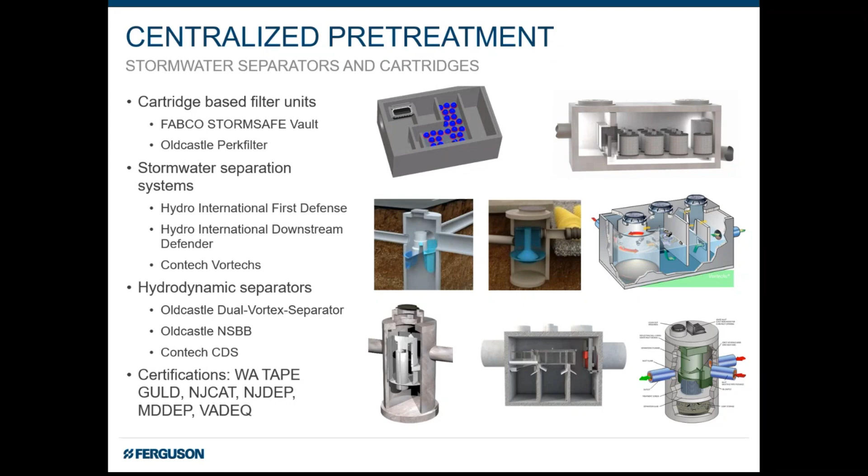And then I'll just show some pictures of stuff. This is cartridge-based units, so this is upstream of a BMP, and you can just see you put normal grates and stuff over it, depending on where you're putting it, just fit right into an inlet.

Getting specifically into decentralized screens and filters. If you don't have the space on site or the need for a really large centralized system, you can look at something like perforated screens, high flow geotextile bags, or other cartridge-based units that have an overflow. With different mounting options, in pipe or around the pipe, it's a great thought, because normally when you're thinking about maintenance, you're always thinking about solids. You're not fully thinking about trash capture, and it's really nice to have something blocking trash out specifically, not just sediments.

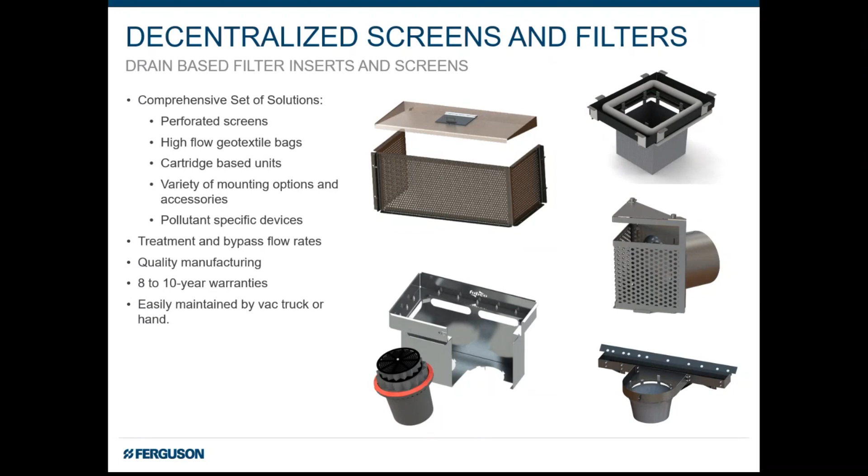This one is just showing a geotextile bag in an inlet. This was for a city where they needed to make sure they have CSOs, but they also wanted to make sure they were capturing stuff instead of getting their whole system blocked up, like what they've had for years, just blocked pipes. So that was a really nice thought.

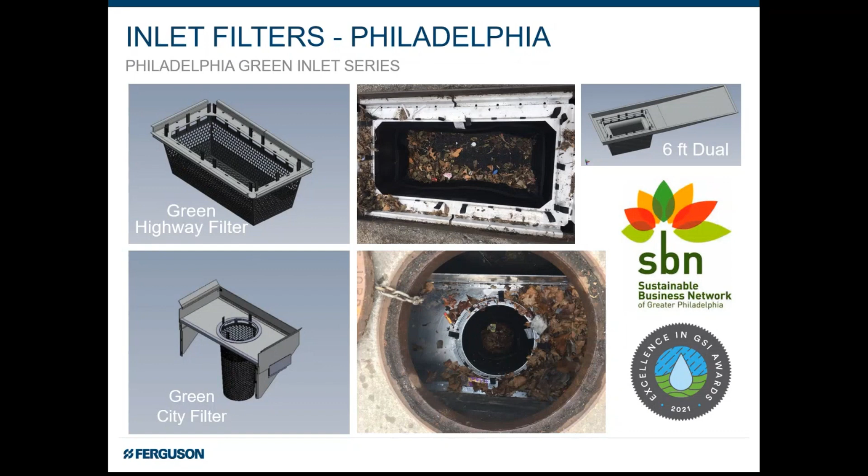We also do a lot of really custom work with one of our vendor partners, Fabco, specifically making screens and filters for what the inlets are. I think a lot of you could testify to the fact that not every single inlet is a nice new, brand new shiny concrete structure. It's maybe brick and mortar, it could be absolutely large or absolutely small. So having that thought of something that can be custom and go in there to really do what your municipality needs is really nice, especially thinking about the pollutant removal specific to them.

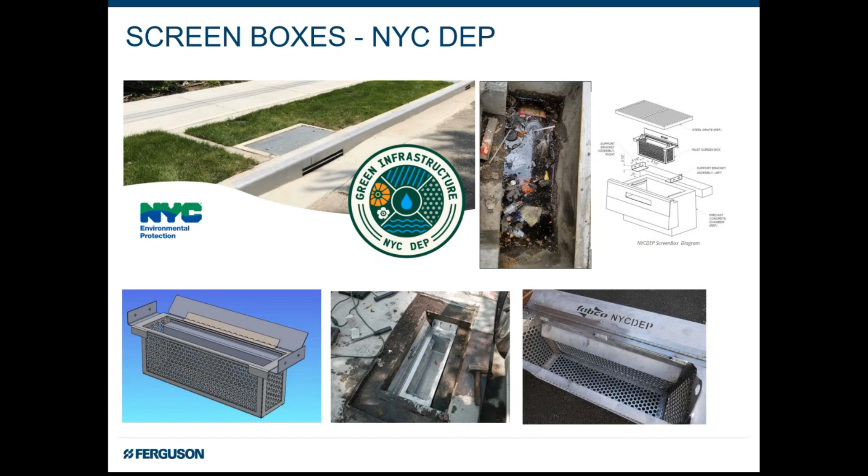Same thing here, just different screen boxes and different ways to be putting stuff in to have water go to the side before it's going into your system or into a BMP.

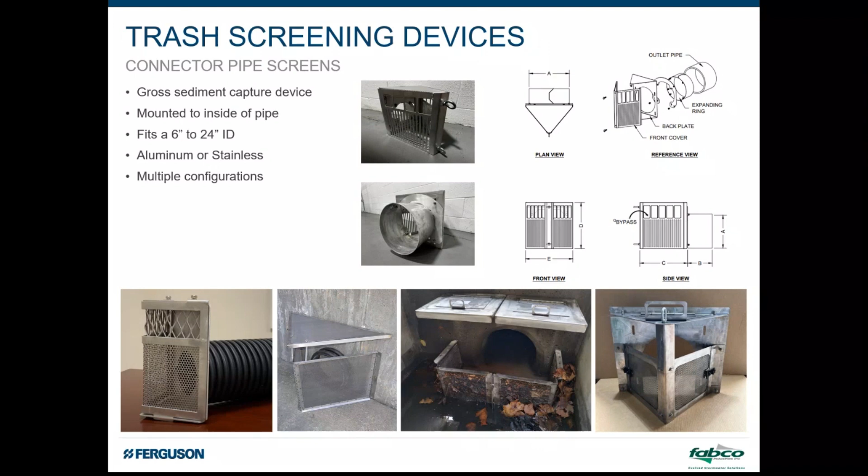Okay, I went through that really fast because I wanted to push through. So just some final thoughts. Maintenance is one of the biggest challenges we all know we're facing.

So pre-treatment devices really enhance your treatment performance. It's reducing your long-term maintenance. If you're just doing continual small maintenance of a pre-treatment device, not having to fully look at the infiltration rates of your BMP or your underground storage system, that's going to be really helpful. Engineers can carefully select pre-treatment devices based on performance, aesthetics, cost, and maintenance. Having those conversations and collaborating is the key here.